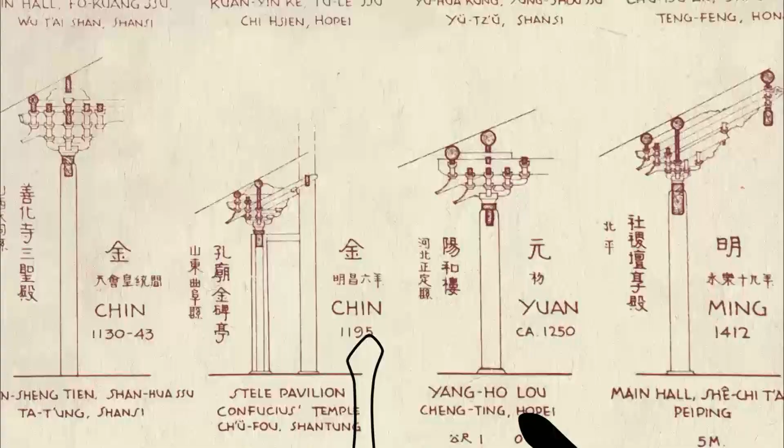7,000 years ago, the people of Hemudu began to put boards on wooden stakes in the ground before setting up columns and beams for a gabled roof. Chinese people gradually moved out of their crude dwellings and began building wooden houses. The choice of wood as a building material was natural because of its abundance. A house built directly on the earth has an incomparable sense of security, both physically and spiritually. The giant gabled roofs and wooden walls bring the family close together.

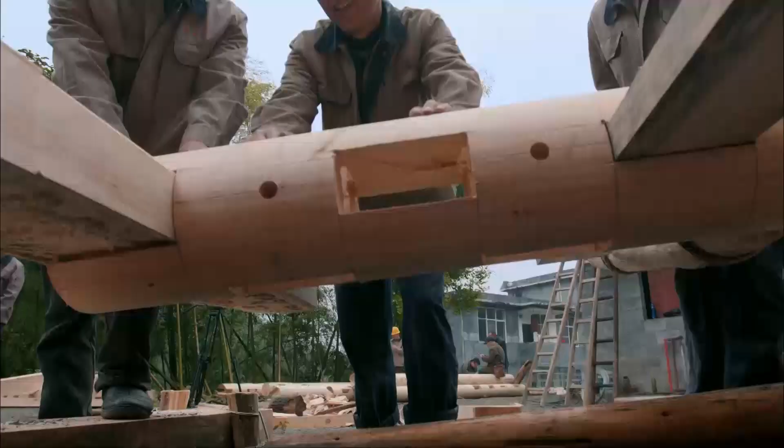In Xianfeng, a small heavily forested town, a house on stilts is nearly complete. The timbers are connected by mortise and tenon joints, and no nails or steel parts are used anywhere in the structure. This is a large project. Over 500 various-sized wooden parts are all waiting to be built into a house.

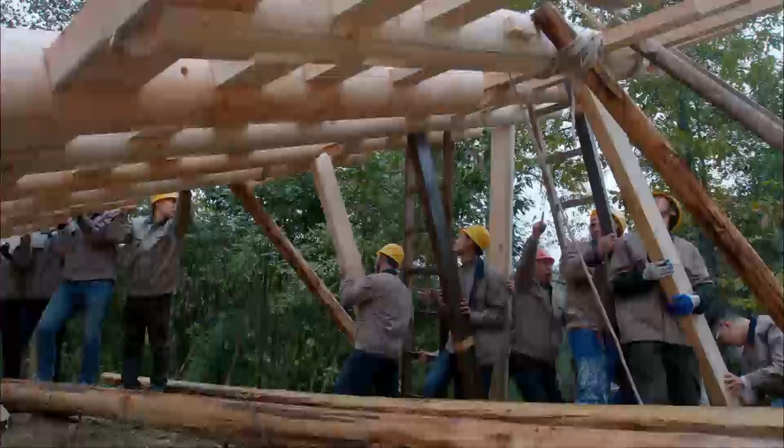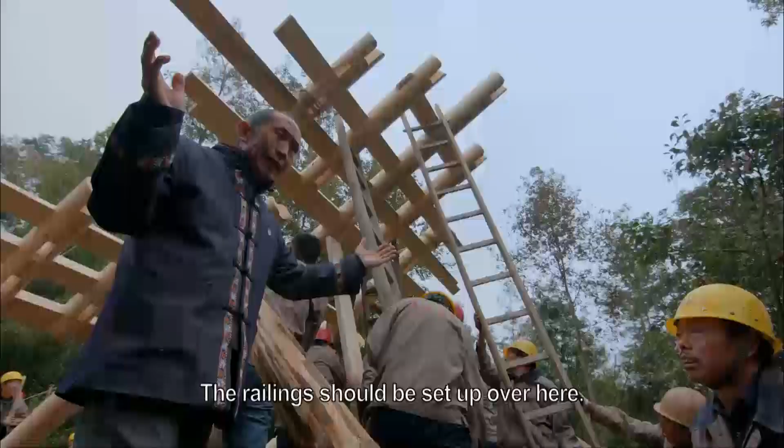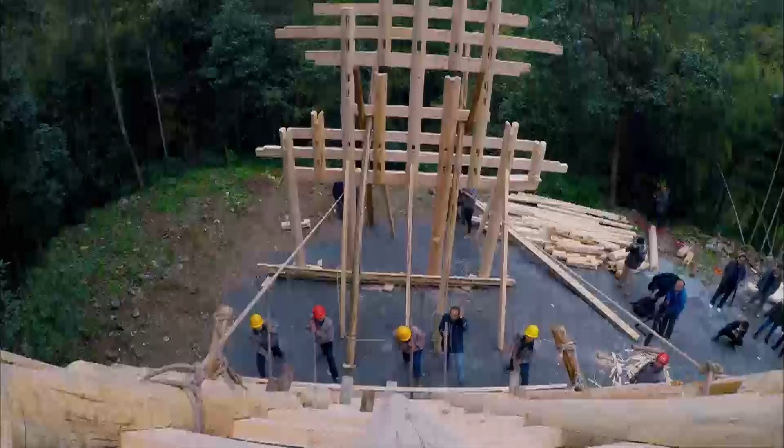The house is being built on a steep hillside, which complicates the project. It takes experience to handle all the issues involved in house construction, and Wan Taoyuan has that experience. He directs overall operations during construction of a stilt house. The houses must take into consideration the topography of the site and requirements of the owners. Wan doesn't need any blueprints since the design is all in his head.

Xianfeng is in east of the Wuling Mountains. The hills and ravines in the area make house construction extremely difficult. The clever Tujia people put their houses on wooden stilts to create more space. Stilt houses are very common here. Some stand alone, and others are in groups. Hidden in the woods, stilt houses are popular with Tujia people living in the mountains.

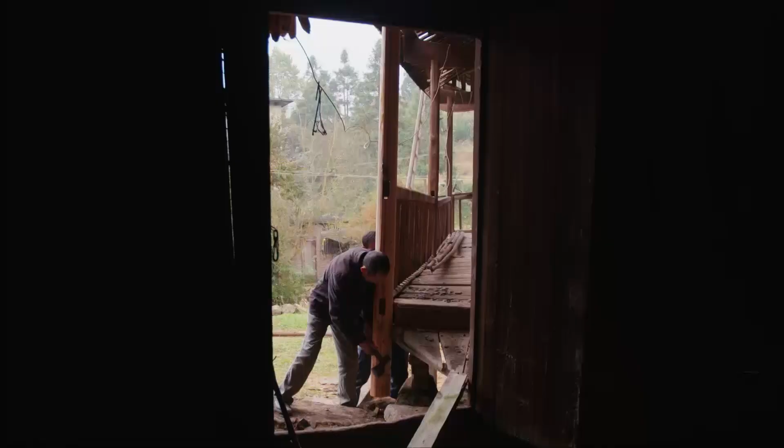The structure is held together by mortise and tenon joints rather than nails, but the structure can withstand the wind and rain. This simple construction method was developed over time by generation after generation of carpenters, resulting in safe homes for the Tujia people.

The fire pit has been restored after decades of neglect. It is a traditional part of a Tujia kitchen. This was the most important room for the Wan family, which they used for gatherings and guests.

The 78-year-old tile expert and his son are honored guests today. Like Wan Taoyuan, they are the owners of a stilt house.

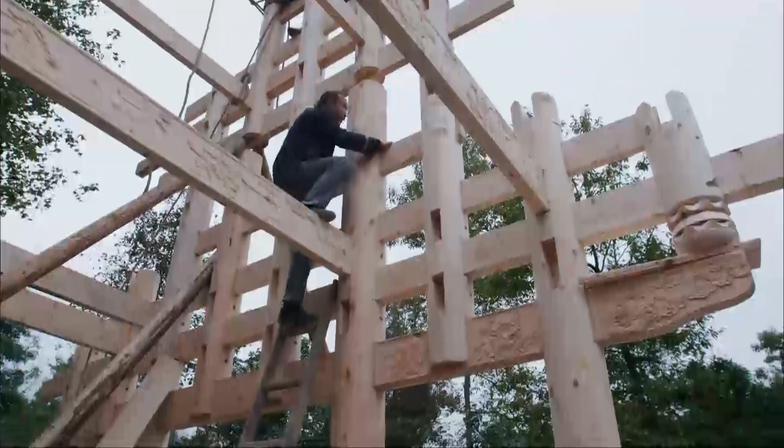Building a house is a major event in the life of the Tujia people. The completion of a stilt house means a new start for a family, so the builders leave food and candies to wish the owners abundance in their new home. Wan has witnessed the completion of countless cozy wooden stilt houses.

Chinese people often prefer houses of wood. The stilts, beams, and the gabled roof comprise the basic structure. These wooden structures have become more than just functional shelter, as Chinese people develop a deep affection for them.

It is September 14, 2017, and the villagers of Xujia Village, Jiangxi Province, are preparing for the evening's opera performance. They are taking down the soundboards, an important local ceremony. The stage will be ready when the task is done. The seats will soon be filled, and the melodies of Chinese opera will fill the air.

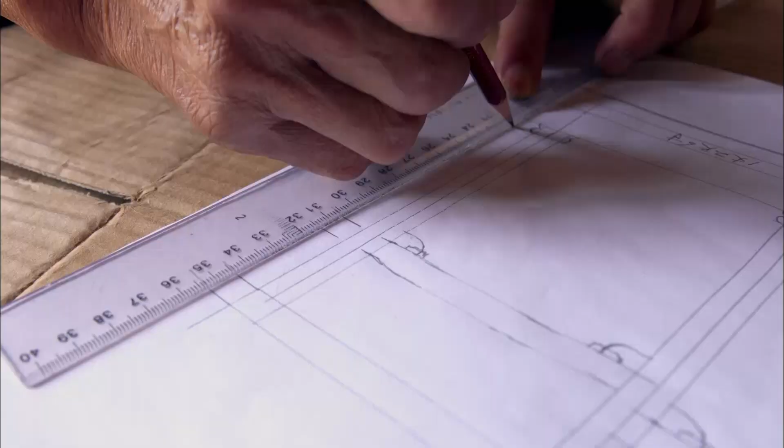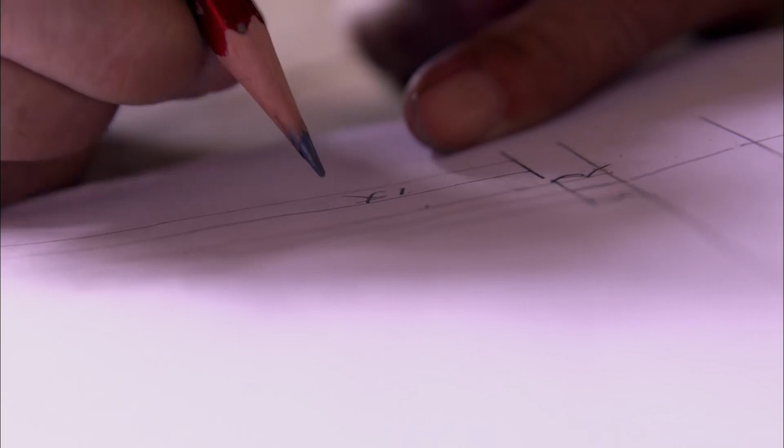The diagram can only be drawn up by an expert. The diagrams clearly cover the whole stage, as well as the position of each carving. The expert has a complete image of the stage in his mind before work begins. Like a computer, he must make hundreds of flawless calculations.

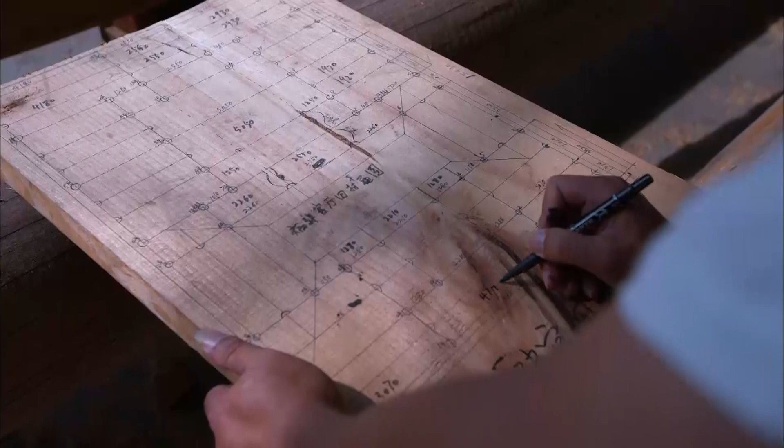The stage's beams and columns are all damaged to some extent. The builder attempts to return the appearance to the original by first making prototypes.

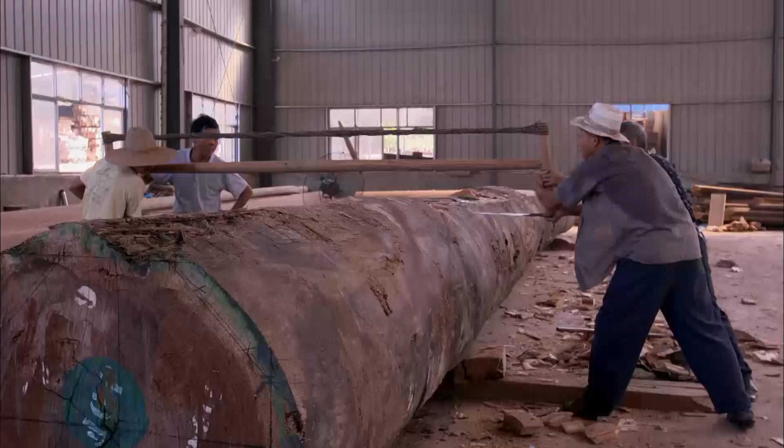The builders usually use China fir, redwood, or camphor wood for the Leping stages. The wood is all handcrafted by the experienced masters. The masters believe that only by using the original method can the traditional style of the stage be restored.

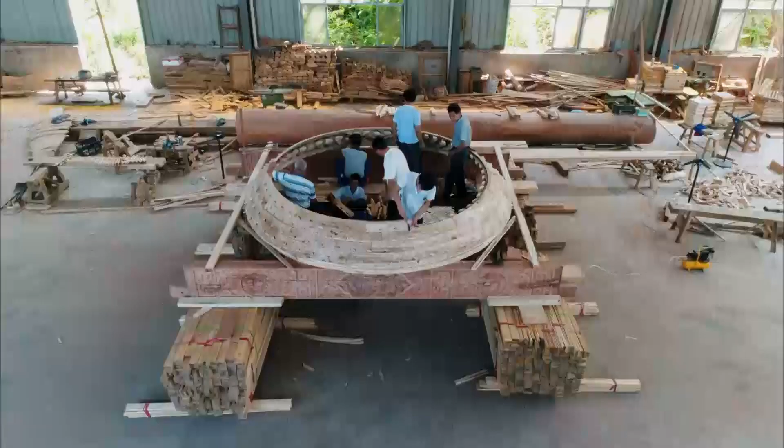As most of the parts needed for the renovation are not ready yet, the builders get to work on something very important: the domed portion of ceiling above the stage. In the days before electricity and microphones, this played an important role in amplifying the voices of the performers, a kind of sounding board right above their heads.

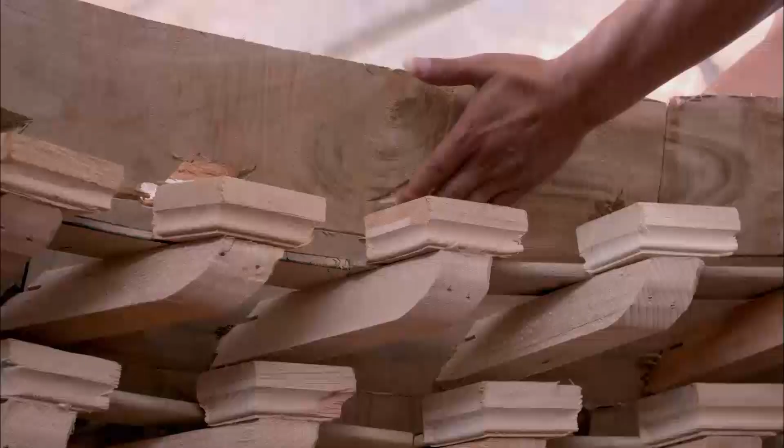The vaulted portion is entirely held together by mortise and tenon joints. If the joints are too loose, the ceiling won't efficiently reinforce the sound. But if they're too tight, the reflected sound will be too weak. It takes a true master to make a good vaulted ceiling.

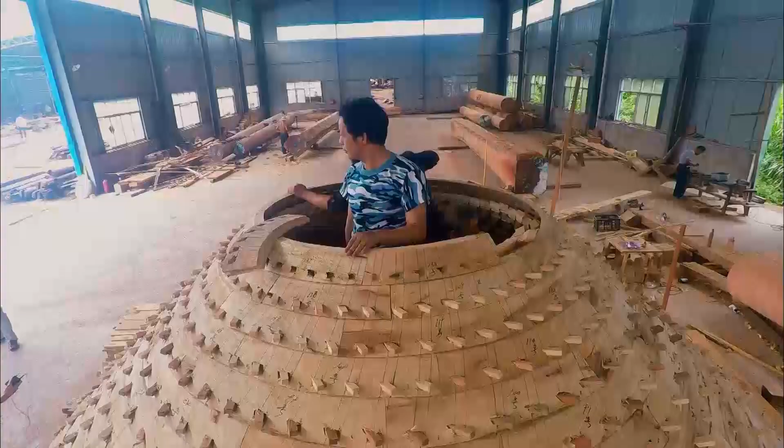It takes 5 experts 3 days to assemble the 2,338 components. It's due to be completed tonight.

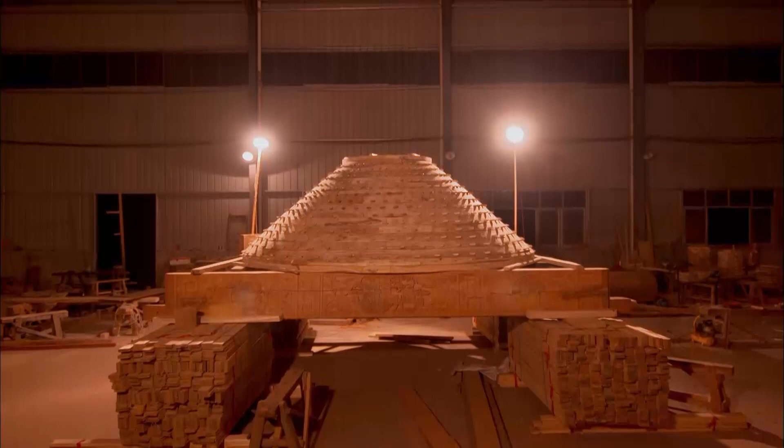This one is composed of 13 layers with a diameter of 8 meters and a depth of 4 meters. Almost all the delicate techniques of traditional Chinese woodworking went into making the ceiling.

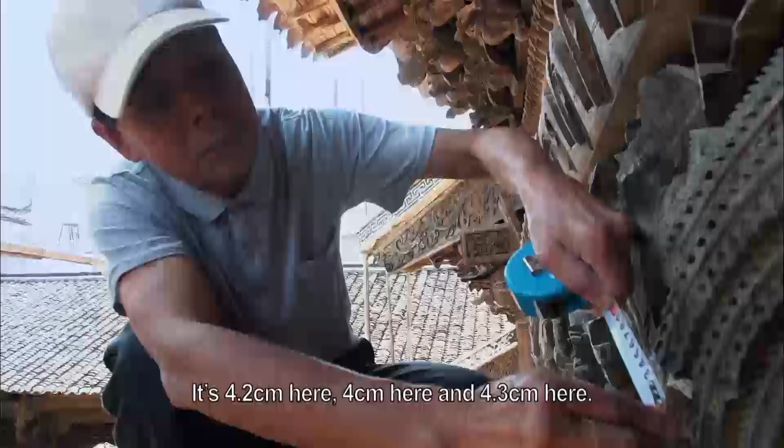The renovation has officially begun, starting with repair of a broken phoenix. This will mainly involve some carving.

Any auspicious symbols can be the subject of artists, such as blessings from the heavenly beings and symbols of longevity. The images are created with carving knives, chisels, planes, and hammers.

Ancient people recorded their observations on life in wood. The techniques used today have been handed down from the past.

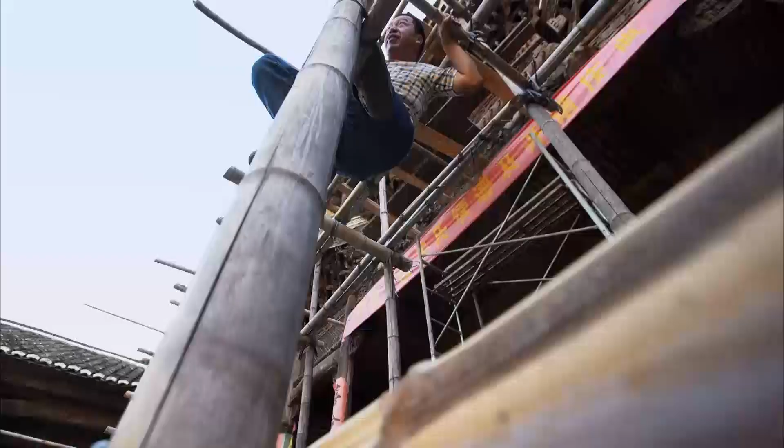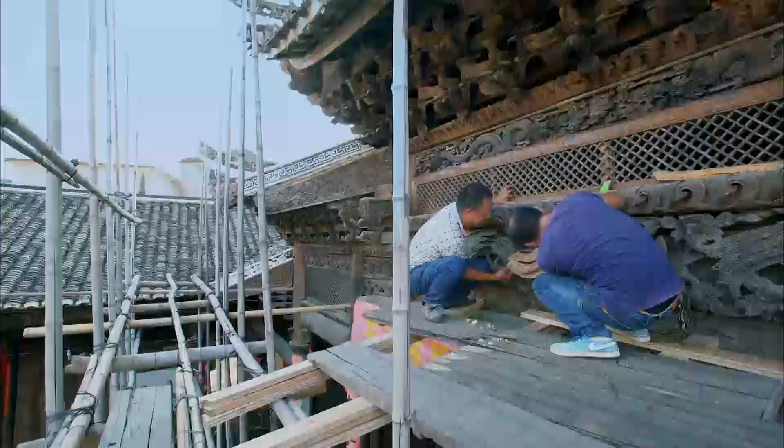This is the first and easiest part of the renovation. Over the next few months, the artisans and builders will restore the stage to the way it looked 300 years ago.

Chinese people have long used wood to build structures such as houses and stages. This use of wood has greatly enriched Chinese culture.

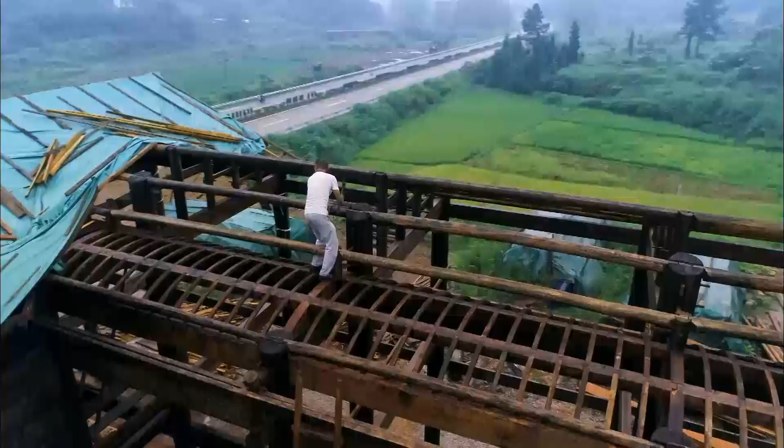Chinese people choose to use wood over other materials to build houses. Perhaps they believe that wood best matched the temperament of the Chinese nation because it is also gentle, upright, flexible, and malleable.